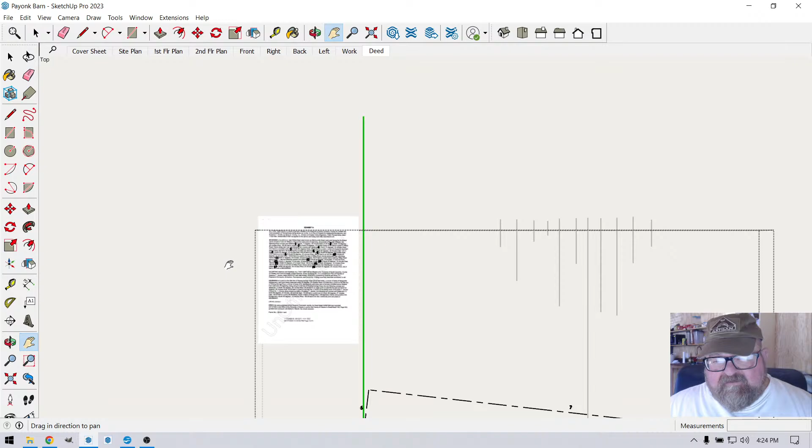Oh man, I was working on Sabrina's barn. I think I have a video on this already. Let's just go to the working file. I'll show you, this is the barn, and this project started off as a simple barn, right?

Nothing in life is simple. Whoops, let me turn off the air conditioner because people will say, I can't hear. Now let's check our fancy system here, see if I'm still in the frame since I moved my big butt to turn off the air conditioner.

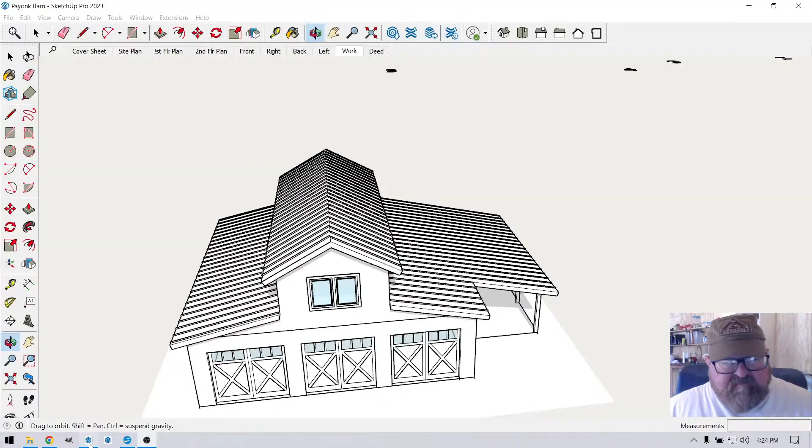Anyway, where are we? Let's turn on the site plan. In any event, don't pay attention to these lines that appear. So I go to do her site plan, and I find out there's this contested property line right here. This is the survey I was given from these guys, and I was like, how does this happen? You know, if you're doing a survey, it's weird. This property line from 1973,

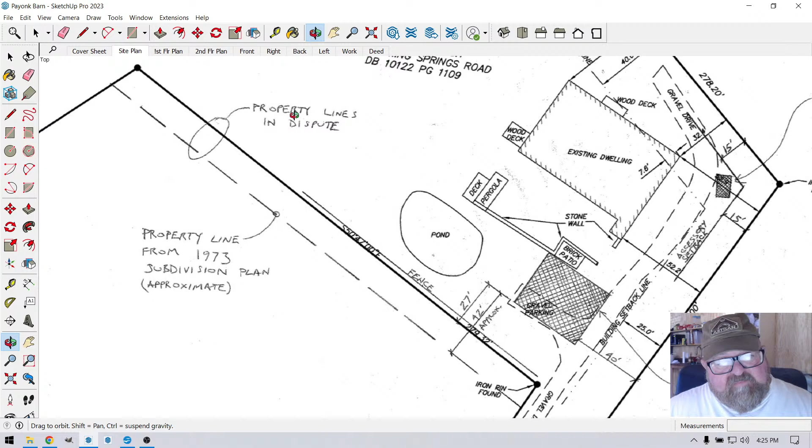property line in dispute. Okay, so I said to Sabrina, Sabrina, where is your deed? That is what you own. This is just a graphic representation of what you own. This piece of paper is not your deed. This is not,

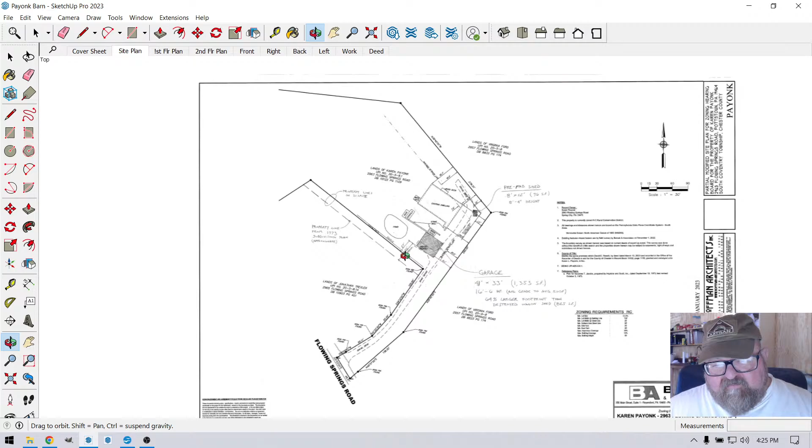I mean, here's what people get confused, okay? This drawing is done by a licensed surveyor, but it is not your property. This is not your legal description. Your legal description is in your deed right here, okay? So what I did was I went in and I picked out all these points. This one paragraph basically tells you everything about your property. And this is part of her deed, okay.

And you can read it: beginning at a point in or near Hilltop Road, also known as Birch Runville Road, said point being the southeast corner of land of John E. Williams. Thence from said point of beginning along lands of the said Williams, the following three courses, and all this rigmarole doesn't really mean anything except these numbers.

Well, and letters. Here you go. Number 1: North, 11 degrees, 40 minutes East, 81.5 feet. Okay, so these little red numbers are mine because I was having a hard time following, since there's literally extra callouts in here starting after number 10 than what are on her drawing.

And so this started to get complicated. So what I did, and this is usually what I do when I get ready to do a survey or draw one, I'll set up a spreadsheet, let's see if I can make it bigger, that will have the callouts on it.

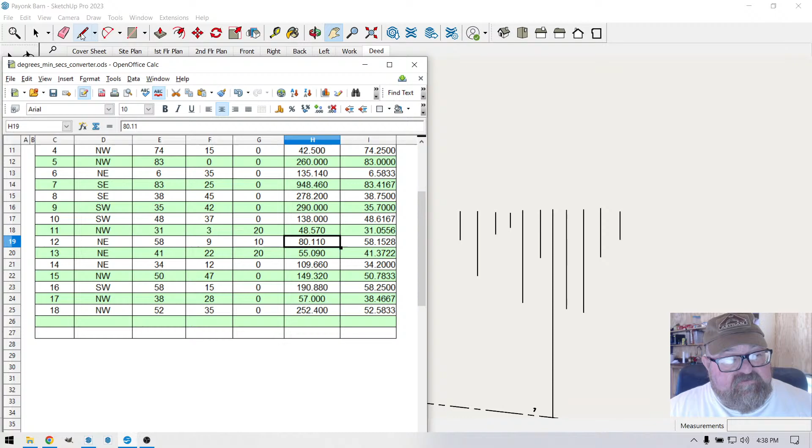So what I do next is let me bring this back up. Let me get this. Now I'm going to lose it again. Yeah, now I got to bring it back up. Let me get this one selected, I'll bring this up. All right, so that's when I need my window. I had the default tray on SketchUp moved closed because it was in the way when I was trying to do the deed and the table, the spreadsheet. So now I can see, so now I can check up here on the entity info panel.

You just click on the line and it will tell you right here - 81.5. So 81.5, okay. Number 2 is 182. Number 3, and I wish there was a way I could make this stay up there. I thought if I was only selecting this, anyway, 63 feet. This is 42.5. Next one should be 260.

That's what I should do, is just do a couple at a time. And then 135, 14. 135, 14. I'm checking these because I missed one. This was the long one.

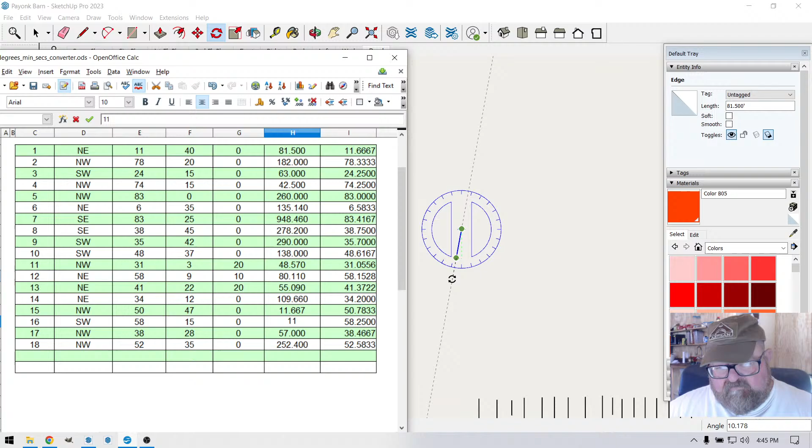Okay, so again, it's been a long time since I've done this. What you do is once you start turning it, you turn it to where it's facing northeast, okay? And you click, and then you can type in your number down here. You see, 11. And when you're doing it, you won't have this problem because...

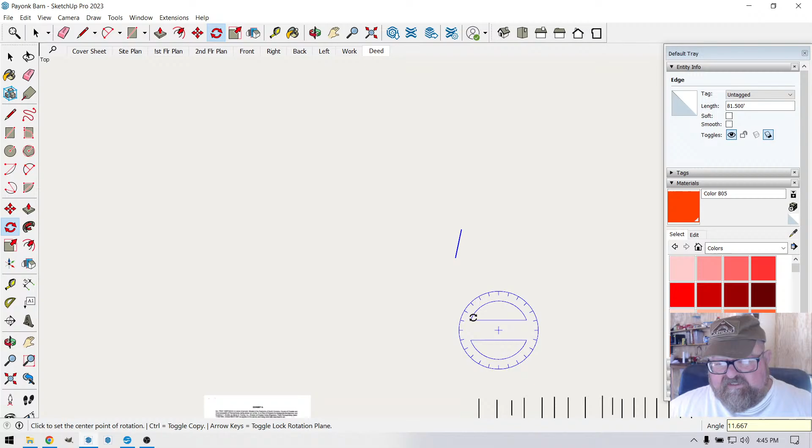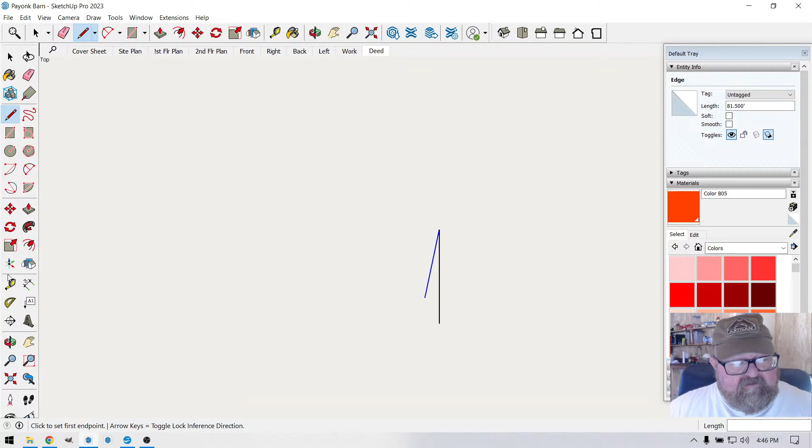It's the easiest thing to do is to print this out so you can look at it, you know. But if I just put myself a straight line down here, okay, and I get the compass tool out and I do this, you'll see down there in the bottom corner, 11.667 degrees, okay. So it might not have looked like it worked, but it did. And as I go through these, I'll try to remember this number better. Yeah, like the next one is...

78.333 degrees, okay? So now I'm going to go select it. Now I kind of know where it goes, but the way these callouts work is the next line is a continuation of the first one, okay? So I'm going to move it up here, but I'm not going to connect it yet, okay? I'm not ready to connect it until I get this at the proper angle, okay?

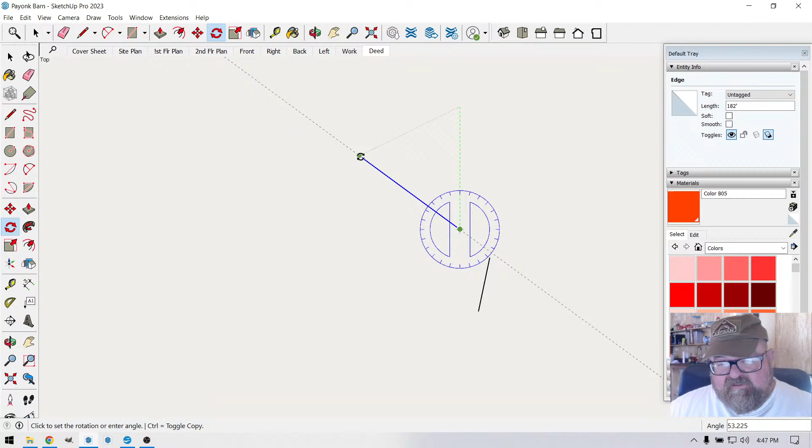Now I'm going to go, I'm going to click on this. I'm going to get my rotation tool going, and I need this to go this way, right? It's going to go this way, and what did I say? 78.3333. Okay, so I'm going to rotate it this way.

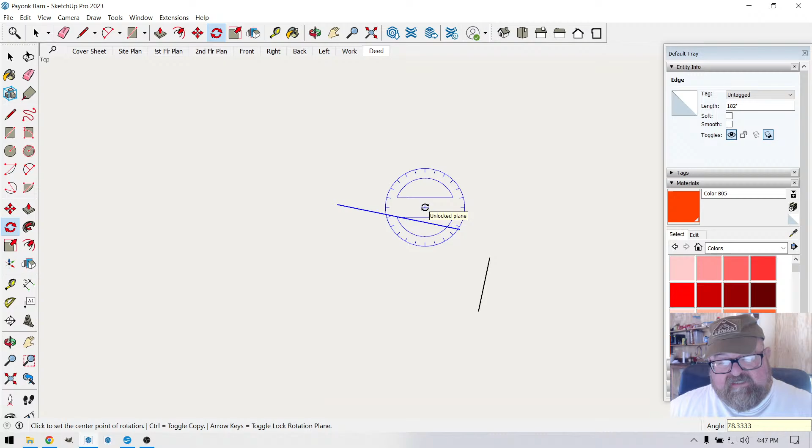Okay, then I'm going to type in 78.3333. You see how it changed? It doesn't matter. You know, if you draw a line and you rotate it, you grabbed one end and you grab the other end and you rotate it. Oops, I didn't mean to grab both of them. If you grab a line and you're rotating it, wherever you stop doesn't really matter as long as it's going in the right direction, okay?

You see down at the bottom, you see the relative angle. That angle is relative to the item that you selected. So as long as you get it going, and you noticed this was straight up and down, the last line I did, okay? But I tilted it in that direction because I knew it was 78 degrees, right? And then all I did was let go, and then I can type in the angle. As long as you type it in right after you click, it's going to work. So now what I can do is connect them.

Okay, now I can take this line and move up here. Now, some people may think this is kind of a crude way to do this, and maybe you're right. I don't know, but this is the way I've always done it, and I've never had any trouble with it. This is going to be number 3, and it goes...

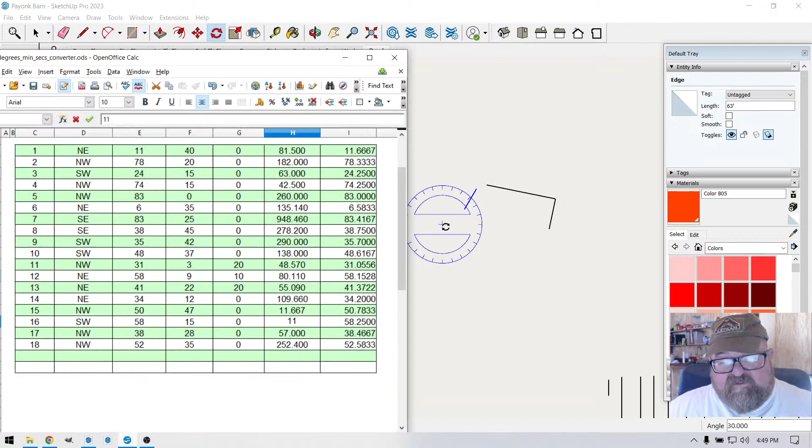24 point. It goes southwest. Okay, so when I see southwest, I know southwest is that way. Okay, so I'm just going to click southwest, and I'm going to go back and check my angle. 24.25. Now I'm going to go down here. 24.25. You see it move a little bit? It corrected it because I typed in the correct angle. Now I've got it the right angle.

I can do that. Now let's move this one up here. Let's move, well, I don't want to move them all. Let's move this up here. Let's see if I can remember one so I don't have to annoy you people with going back and forth. This one is northwest.

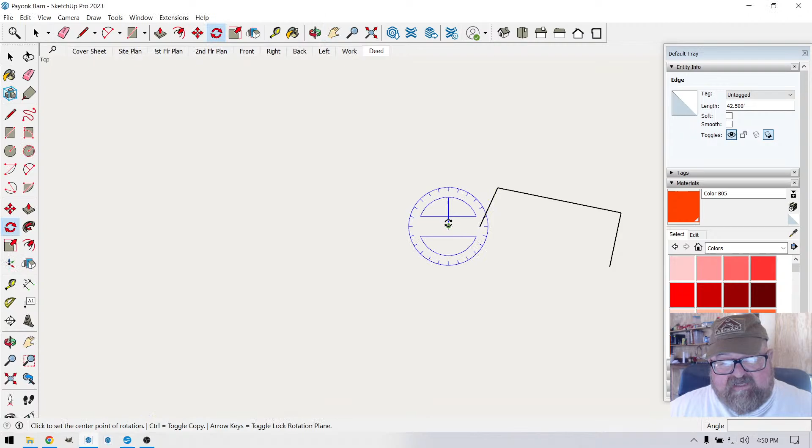74.25. Okay, so northwest, if you know your map angles, your directions, you know the northwest is that way, right? And I don't know, I'm getting Alzheimer's now. 74.25. I've been looking at these degrees and angles and these numbers for 3 hours. Okay, so they're all in my head, and well, they're not in my head in the proper order.

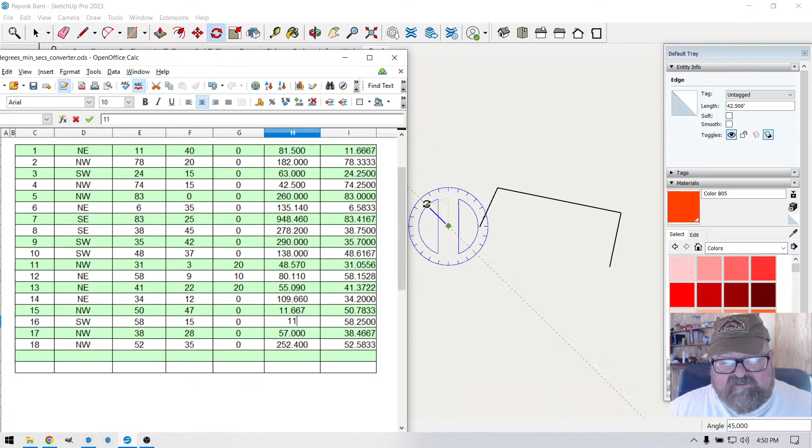74.25. So I'm just going to click in the northwest direction. Okay, now I'm going to type 74.25. Okay, you see it laid over. That's the way it should be going. Right there. Okay, let's get another one.

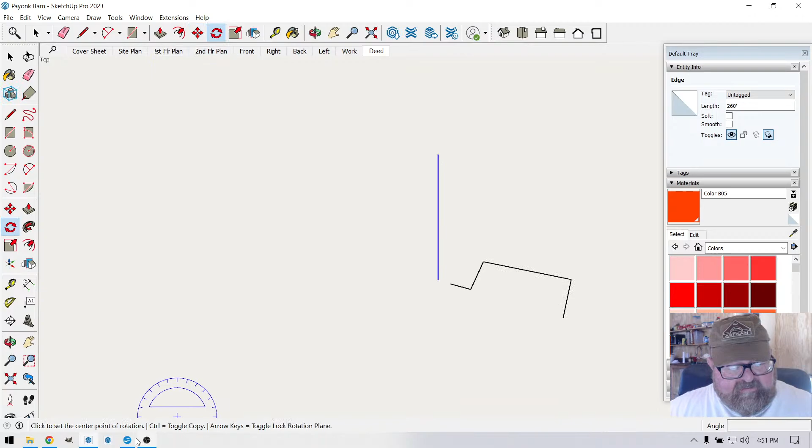And by the time we get to the end, we will be really good at it again. Now we're going 83 degrees. That's an easy one, northwest. Okay, so again, I got to go northwest. I'm just going to click anywhere, and then I'm going to type 83 degrees, and it'll fix itself. I like it when things fix themselves.

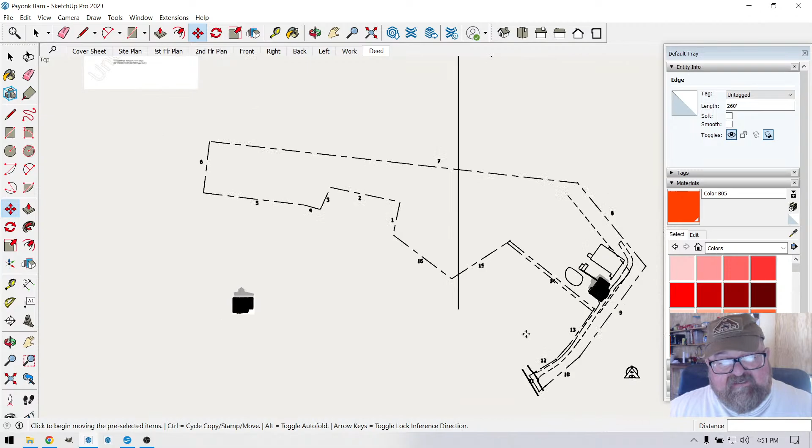One of the problems with this survey is that this file was given to me by a surveyor, I did not draw this. His drawing doesn't even close, right? And it's because he's left out some things from the deed, and that's why I'm doing this. I'm trying to show the owner that... I guess it closes there.

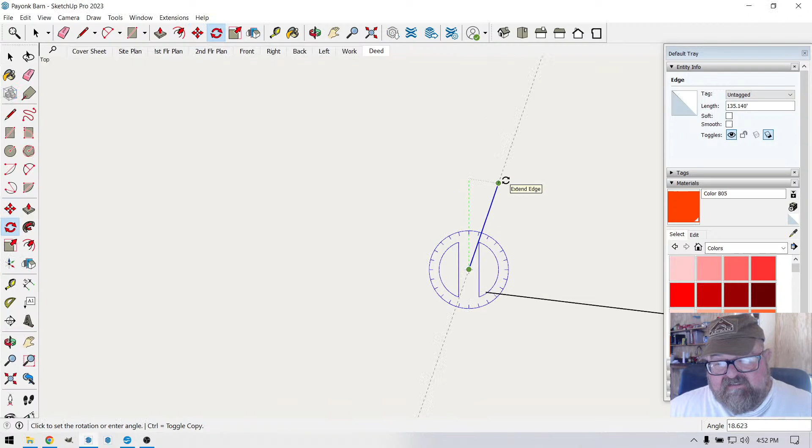So then this one, we'll move it up here kind of relatively where it goes, and then we'll go look at our angle. That is northeast, 6 point... You know what I could do? Can I do this? Can I copy that angle? Am I getting smart? Go northeast. That way's east. And then can I do control... No, you see that here? It wouldn't let me control V.

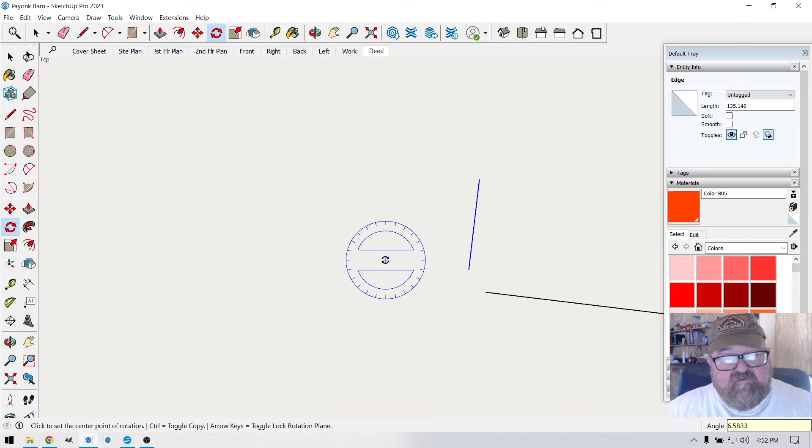So I'm gonna have to go back because I didn't remember. 6.5833. Part of the problem is I can't see my keyboard very well because I've got my laptop folded over, because I have a big monitor in front of me and I got my laptop down here, and the top of the laptop's leaning over towards me, and I'm having to look under my keyboard.

Then we got this big mother right here. We got Big Mama right here. So we're going to lay her up here, and we're going to go back to our table.

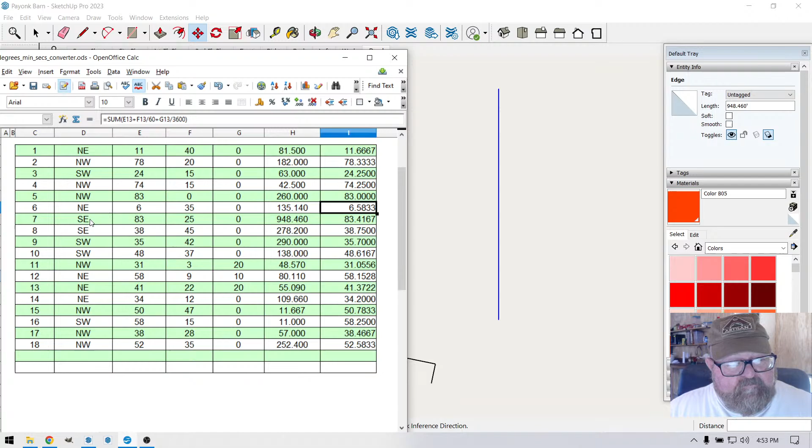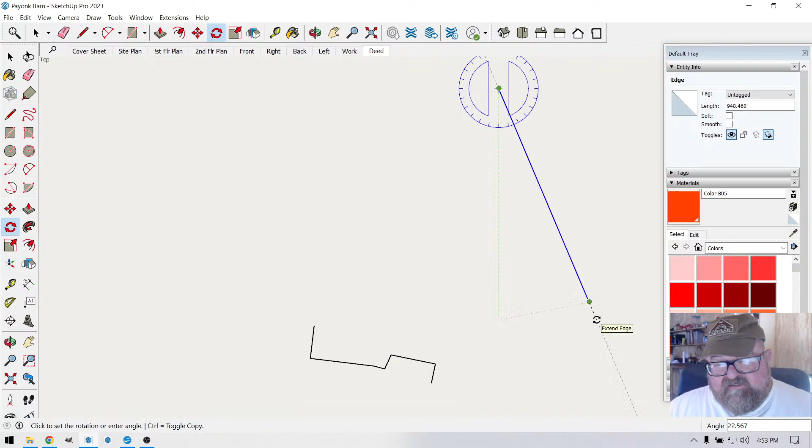83, it goes, so southeast, okay? And I'm just going to go ahead and... see, it confuses me a little bit because I know I'm going to lose my angle. I'm just going to do the southeast first, okay? So we know south is down, right? And we know east is that way. And I know this, I'm kind of cheating. I know it's way up here, but I'm just going to do it right here to show you how when I type in the angle, it's going to be fine.

834167. Now what's depressing is I have typed in the wrong angle before and have to go back and check every one of them. So we're going to pray that that doesn't happen here. It's hard to do a live stream though and be perfect at the same time. I try, I really do. Trying to be perfect.

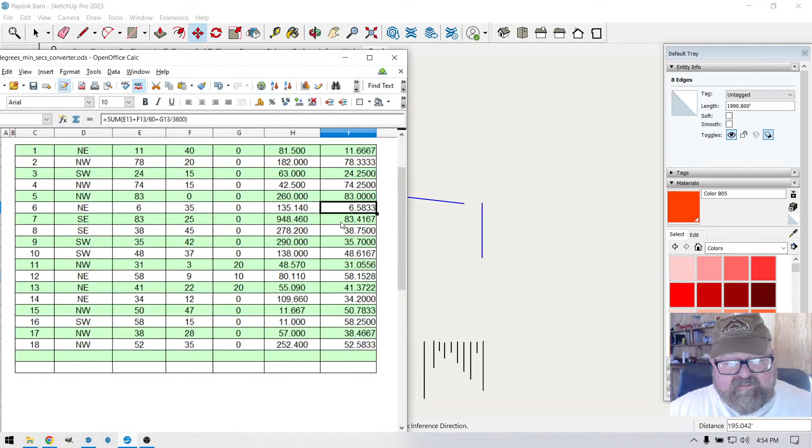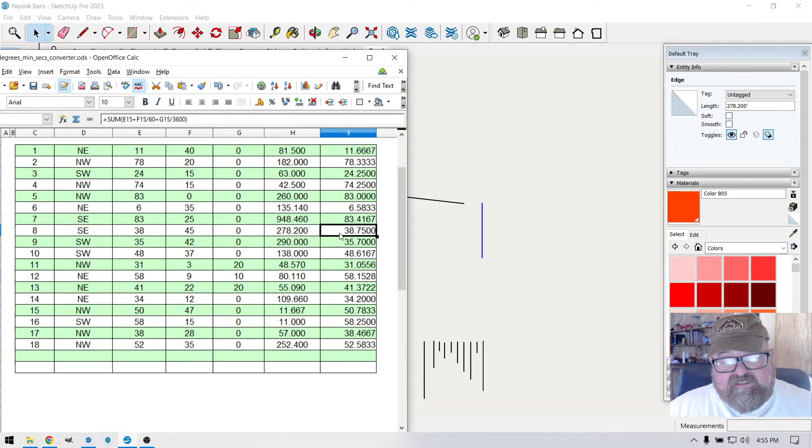So now we're at this. Let's see. We're at the two. I need to check to make sure which line I'm on, just to verify it. 278.2. Oh, we're all the way down here. Okay, so 3875 southeast. 3875, okay, I think I can remember that. Okay, southeast. 38.75. Oh, that's right. Huh, it's that one. Okay.

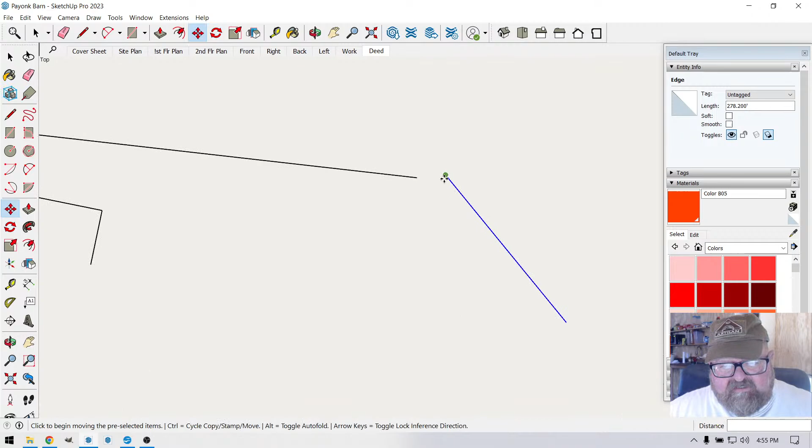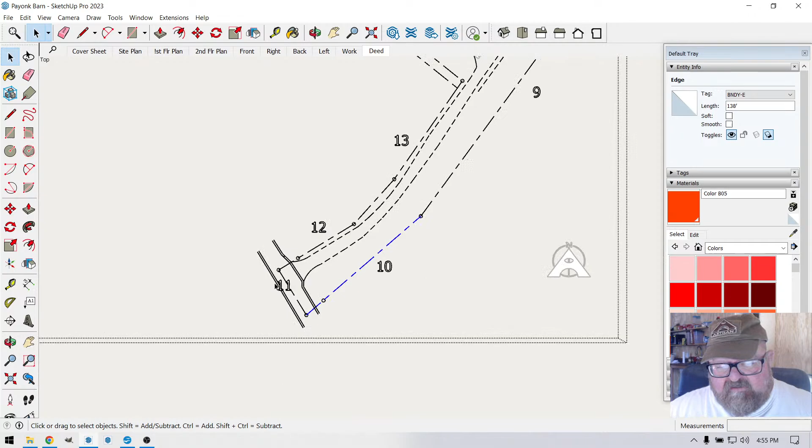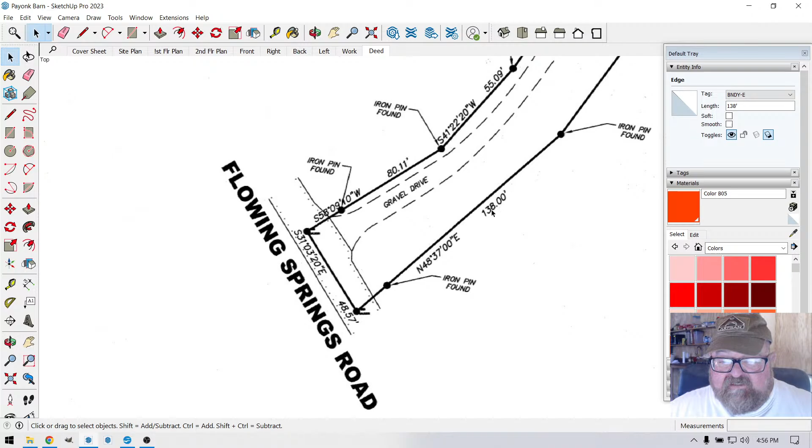I'm kind of cheating a little bit because I kind of know. If I didn't know what this property looked like, well, you kind of always kind of know what they look like, but I am referring to it, and there's going to be some funkiness down here when we get close to the road. I'm predicting, because you see this line right here, the surveyor is claiming this is all one line, but then he found a pin right here. That's a pin, okay, those little circles are pins. So if you come over here, he calls it out an iron pin, but he doesn't have a call out for that little short line segment, which is a boo-boo, right? Because you're supposed to stop at each pin, gets its own call out, right? Or each line does. So he's saying 138 feet goes all the way down to here.

So I believe the surveyor was doing some moonshine that day. I don't know what he was doing. Hitting the wacky weed, I'm just kidding. By the way, if you're seeing his name on this, I'm just trying to enter some humor into this. I don't know the guy, and so I shouldn't talk about him like that because he's a professional, and I don't want him to be mad at me.

But I do have a problem if it turns out he didn't even read the deed. That's where I'm going to question his manhood.

So 290 should be the next one, and you can see why some of these angles get confusing sometimes—they're similar looking. That one's the 290. Okay, this one should be 290.

Now the reason I like to keep them separate is because I could go ahead and connect this one, but sometimes honestly I'll start from the wrong end when doing the angle, since it doesn't really matter as long as I get it going in the right direction—and that would move that line. When you connect lines in SketchUp, they're connected for good until you disconnect them.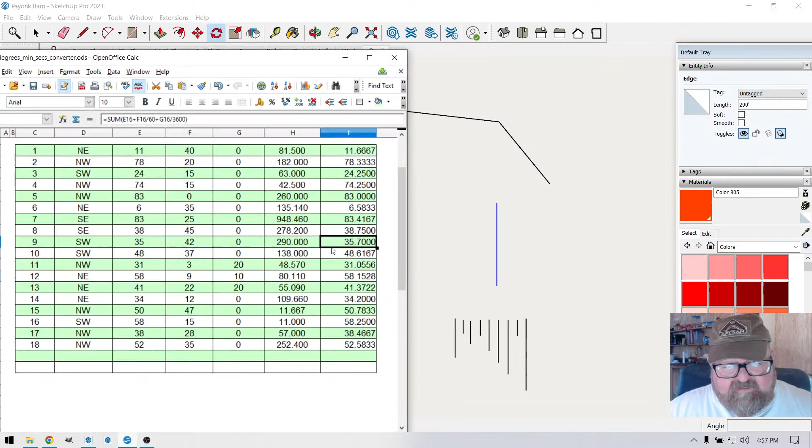Let's see, so I'm going to go here. I need to go 35.7 southwest. So I'm going to go down south, then west, and then cheat again—35.7. I'm going to come back here, 35.7.

Don't tell me I didn't see it move. Did I get it? I didn't get lucky, did I? Because I knew kind of where it was going. I'm going to do it up here and then type in 35.7. Okay, I'd feel better now—I must have got lucky because I didn't see it move.

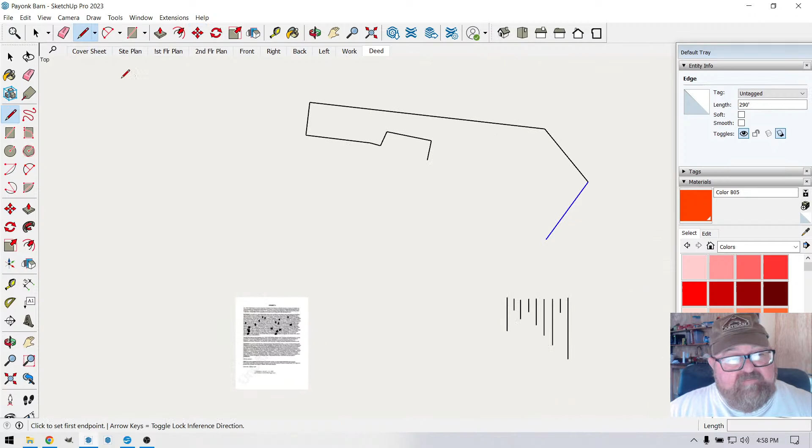Now we got this little line right here, so we're going to grab it, move it up. I did an update on SketchUp Pro 2023 and my buttons are all mixed up.

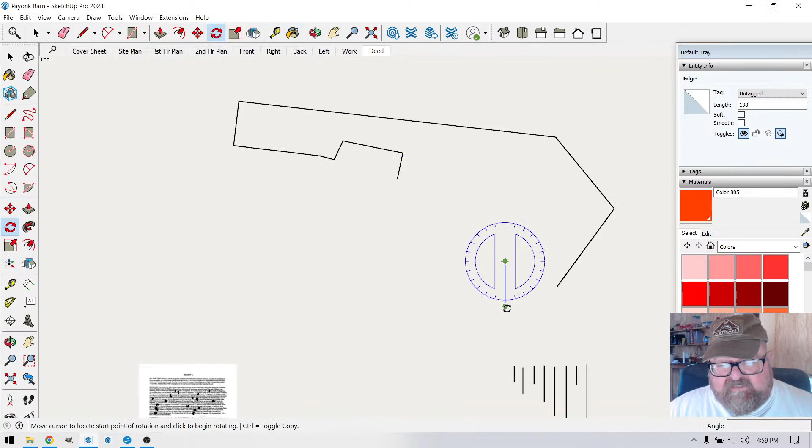This one's going to be 48. Yeah, I'm going to have to come back and revisit that one. So I know it's southwest, so I'm going to go south and then west, and then look at the angle: 48.6167. And then I'm going to go back and make sure—48.6167. You really need to get into a habit of double and triple checking.

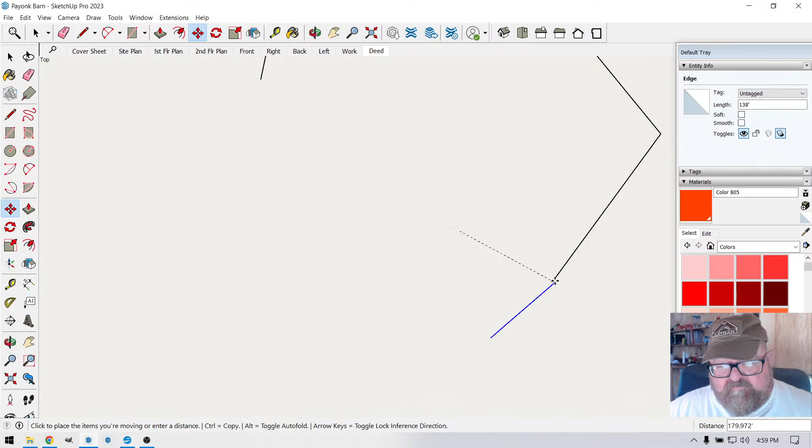I don't think that connected at the right spot. It didn't look right. That looks right.

Because you can really—now here's where we start to deviate, I think. Okay? This is... something's weird about this, and then this is where it gets weird, because there's an extra line in here somewhere. Or something's weird, but we're going to follow what the deed says. Okay? So, well, how long is this line?

This line is 48.57 feet. So that callout is this one right here. And it's supposed to go northwest, which makes sense.

38. Okay, or 31. So I'm just going to get the direction going and then come back. So I'm going to come down here—northwest is that way.

And it is 31.0556. Did I say that right? 31.0556. Okay, I believe it.

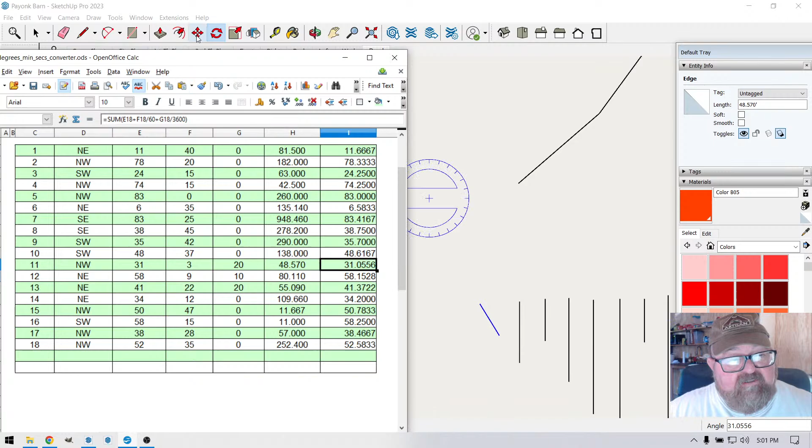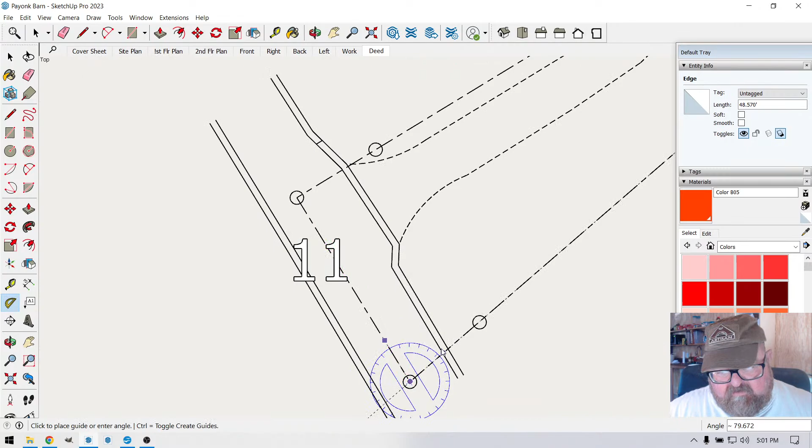Like that—it looks like it's less than 90 degrees though. That's confusing me. When I first saw that angle, I know this is less than 90. That's 79 degrees, so I don't know. Maybe it's not supposed to be. What is this one? Yeah, okay, I guess my impression was that that was 90 degrees, but I was wrong.

So now I'm going to move this one up here. This is where I start to not understand this whole thing right here, and I might even go back to the deed and verify this. So number 12 is—this line should be 80.11 feet, 80.11 feet, and it goes northeast.

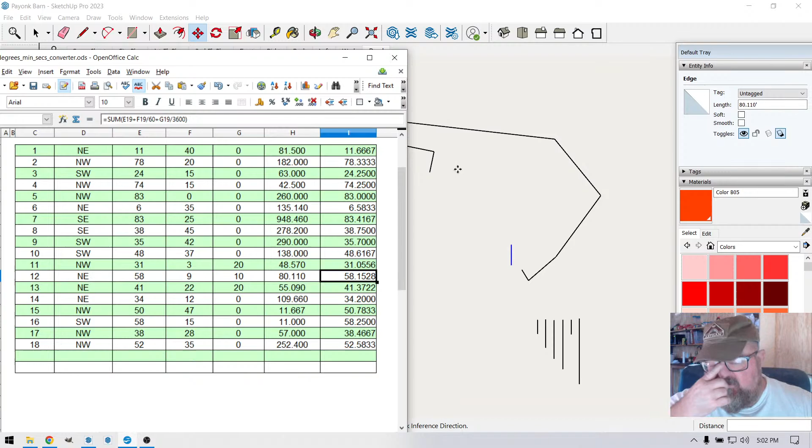Northeast is that way. Okay, at 58, 15, 28. 58, 15, 28.

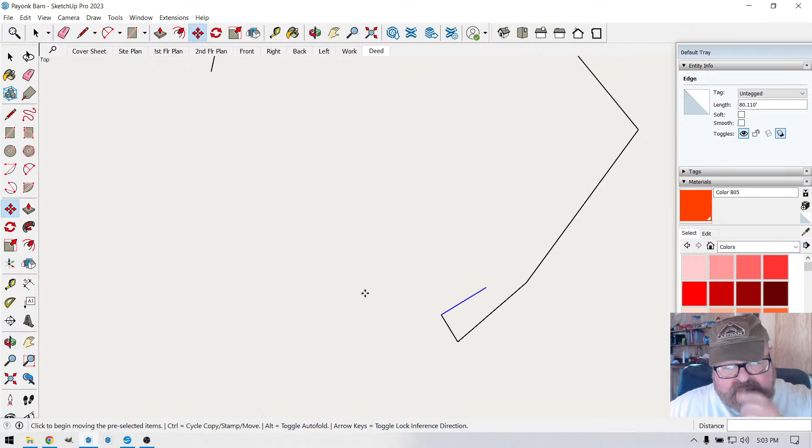Now we're starting to get somewhere. Am I? Or am I just imagining things? I'm probably imagining things. So let's go back here.

The next one is 41 feet. Let's just select it first and make sure—wait a minute, wait. Is that one 80? Yeah, okay, this is the mistake I made before. Right in here, for some reason, I got confused. So this one's supposed to be 55.09, and it goes northeast.

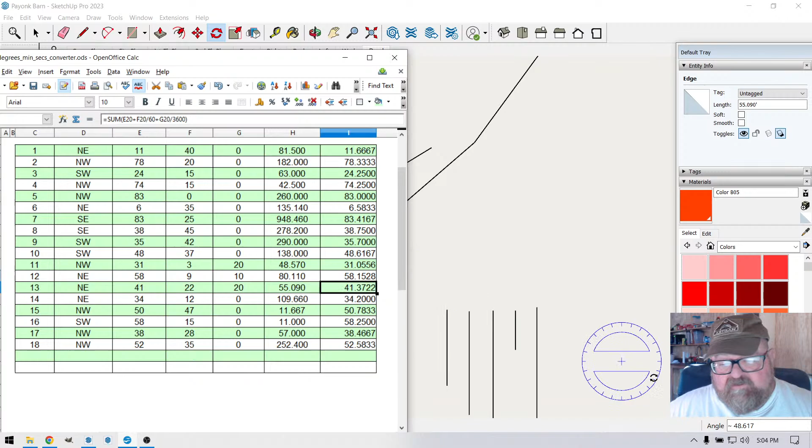Okay, so we're going to—oh wait, let's move it up here first. And then we're going to go northeast that way, and then check the angle: 41, 37, 22. Is that right? 41, 37, 22. Yep, okay.

Why does this... you see, this is different.

Okay, I think what would be funny is if mine closes based on the deed, and this surveyor's doesn't. That's what I'm hoping happens, because I want him to eat crow. I'm just kidding, this guy's gonna find out who I am and come sue me. But he lives in...

109, 109, 66. Stop making myself laugh. So we're going to go northeast again, 34.20. I think I can remember that one. Northeast. 34.20.

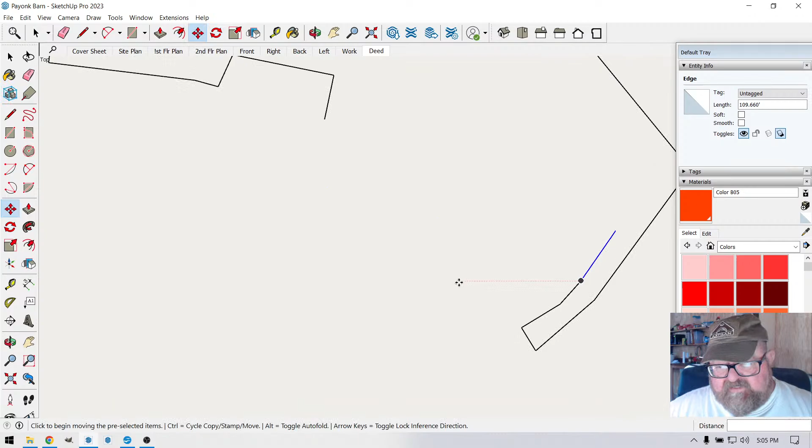Okay, I was looking over here and I didn't see it move, but that looks right. That looks close. Now this is where things get interesting also, because what is this, line number 15? Let's go investigate line number 15. Let's go to the deed book.

Oh, there is something weird here. Number 14 was 109.66. Number 15 was 149.32 feet. Wow, I must have been typing. Was I typing one time and it got entered over here accidentally? I think that's what happened. Switching back and forth from SketchUp to here, I think I was typing in degrees or something. Is there degrees up here? Yeah, look at that.

11.6667 was the degree for number 1, and somehow it ended up down here. See, this is why you got to continuously check this stuff. Number 15 is supposed to be 149.32. And then number 16 is supposed to be, that's the third line up, 190.88. I think the lines I've actually drawn are correct, and that's what made me wonder.

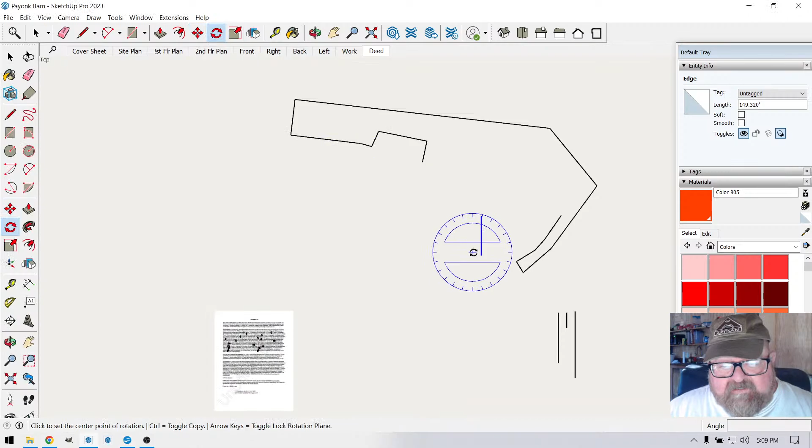Is this 149.32? 149.32, see, that's the correct length. Now I gotta go northwest. Let's just get the line going northwest. Oh, northwest, huh, that's northwest right there. And then 50.7833. 50.7833. Okay.

We're going to go over here and place it right there. I thought that line was longer. You know what, there must be two segments in here. Aha, how much you want to bet that's why his doesn't close? How much you want to bet by the time you get back around here? It's going to be fun. I'm excited, I'm hoping ours is going to close.

So the next line is supposed to be... what is that? 190, yeah, 190.880. 190.880. I'm going to move it up here because I thought that line segment's too short. So yeah, that makes sense. All right, so it's going to be.

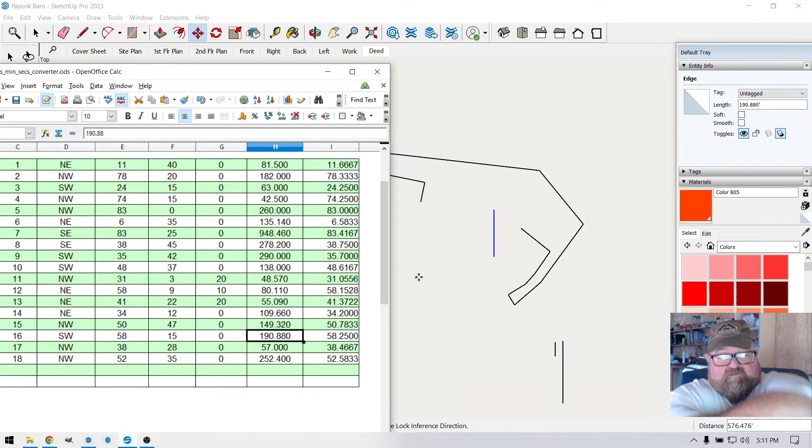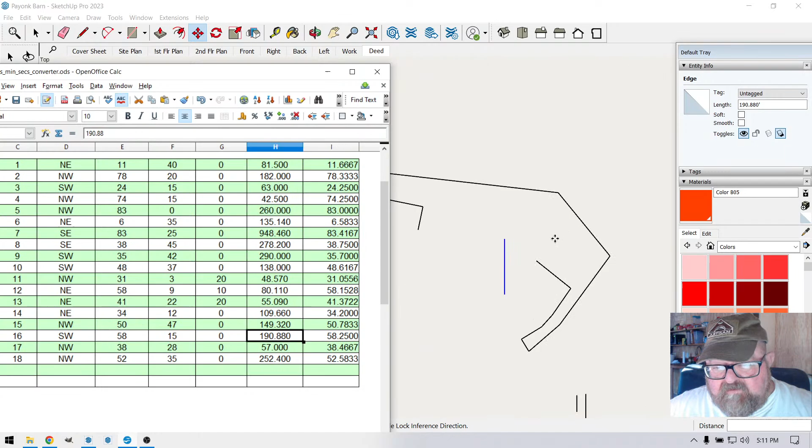See here though, this is different. These angles don't make sense to me. Where am I? 190.880 is 58.25, and it's going southwest. That's not right, number 16. It says southwest 58.15 for 190.88 feet. Okay, we will see, they changed directions on me. You notice how this one was northwest and this one's southwest? So we're going to go south and then west.

58.25. What? 58.25. Well, this is wrong. Oh wait, okay, I'm on drugs. It's this one, I thought there was two line segments here. You see, look how much longer. Look how much longer this line is. We're just going to copy it.

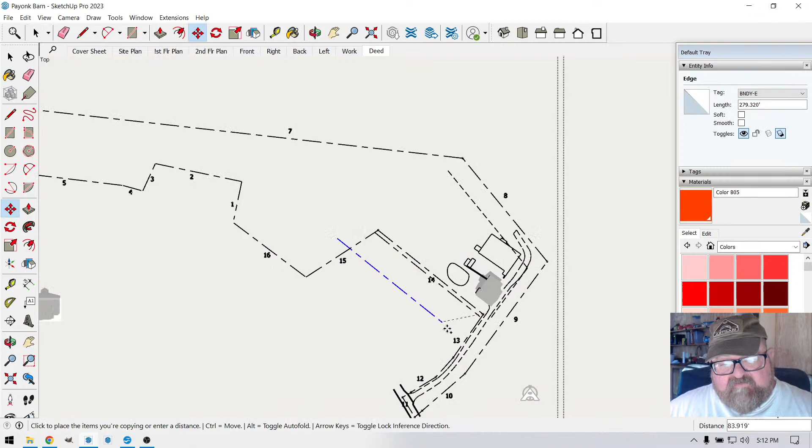This is the big mistake right here. I got this file literally from the surveyor. This file right here, I did nothing to it. Look at this, now you know why I'm confused. Okay, maybe you don't know why I'm confused, but that's why I'm confused. And...

The thing is, if I hadn't seen this down here, I wouldn't be confused. If I was just drawing this from scratch, I'd be just like, okay, next line, next fine line. But this line is 190.88, and then the next line is 57 feet. Okay, that's true.

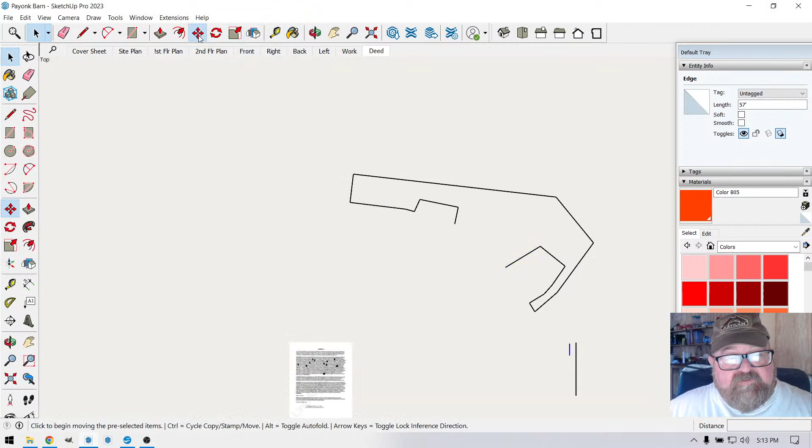So we're going to move it up here. And it goes northwest at 38.467.

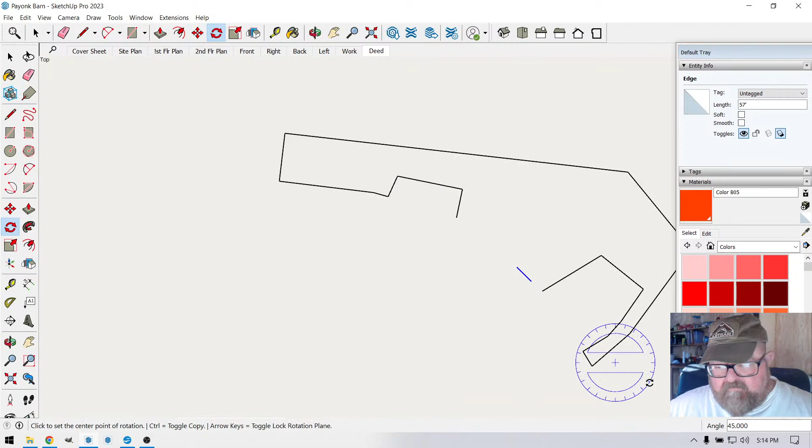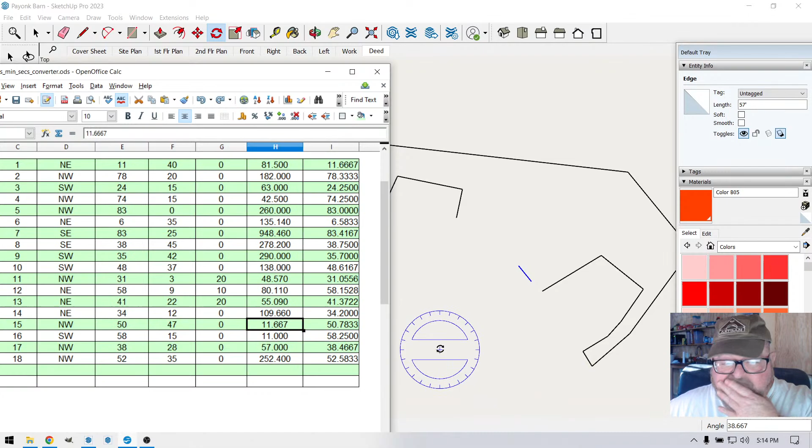Is that right? Four 667. Oh man, what am I doing? I'm on two different menus here.

You know what, that's what happened to this other one. I thought I was on this menu, and I was actually on this menu. So I got to be careful what I'm doing here. What I need to do is click over here and undo this, get it straight up and down again, then go back here.

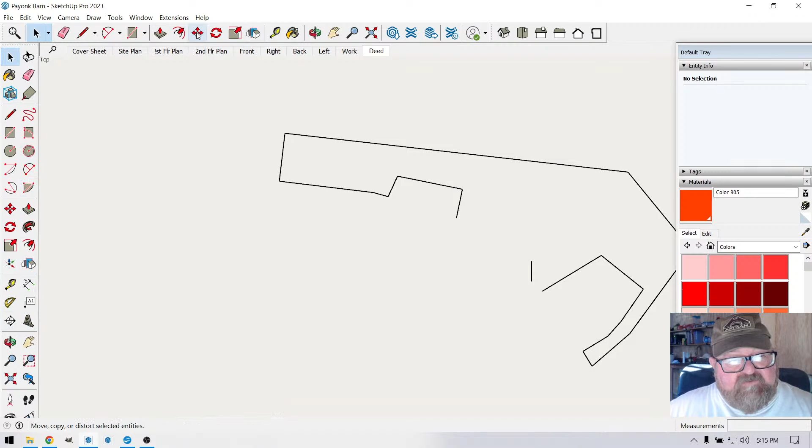And I'm just going to start off southwest. I don't know how that's southwest though. I mean, I know it's leaning southwest, but it should be. See, when you're going this way, it would be southeast. If you're going this way, it would be northwest. I don't get that, this is confusing me. Okay, so it is. Oh, it is. Oh wait, I'm on the wrong line. Okay, it is northwest. I know I'm on drugs.

38,467. 38.4667. Now we shall check it again because I can still see it down here. 38.4667. I've been dealing with these numbers all day, and I'm about out of brain power. Oops!

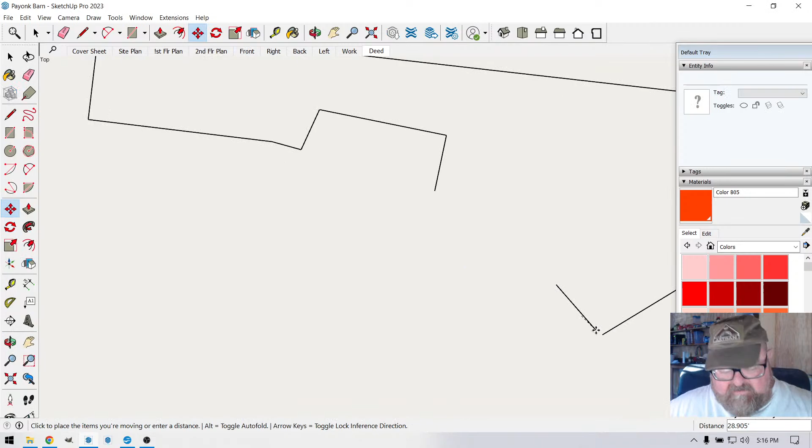Don't do that, Tony. I can't, my eyes are all watery. I can't see.

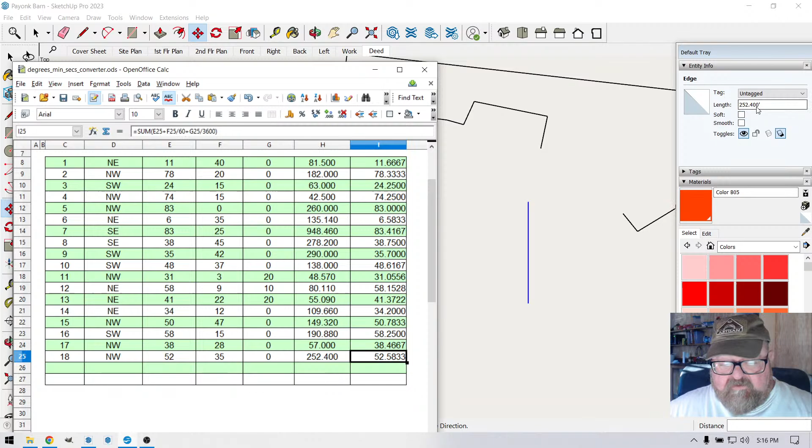Now, the last line, is she going to close? Let's bring her up here and we'll just... so the last one is this one. And let's make sure it's 252.4. There it is. And it's northwest. So we're going to start at northwest.

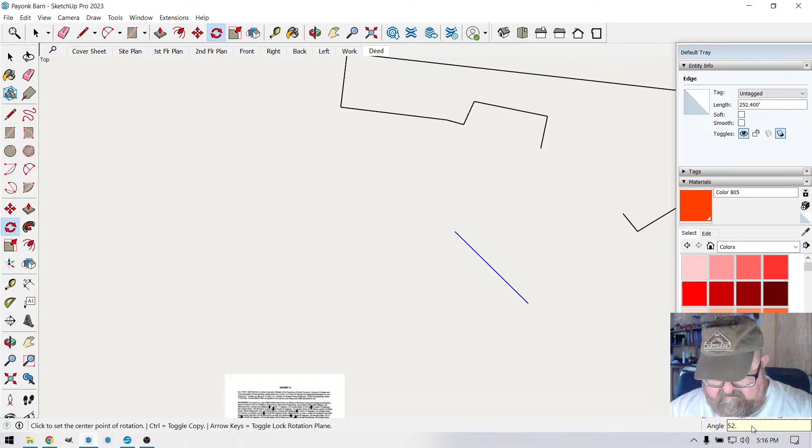And then we're going to type in 525833. 52.5833. All right, here we go. Here's the big one. Now, what I do on the last one, okay?

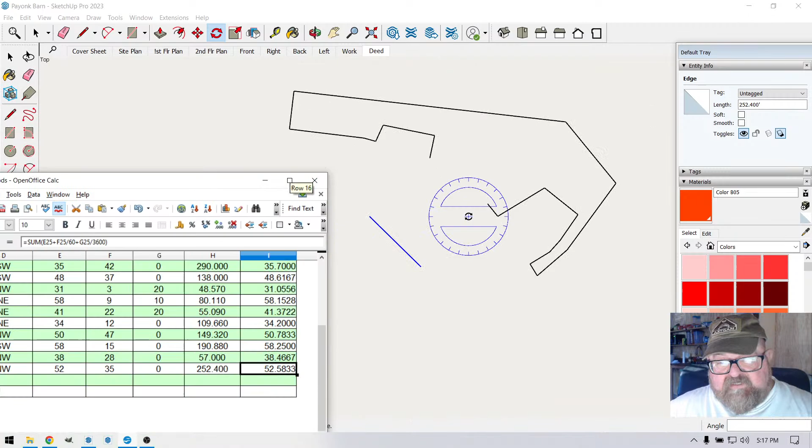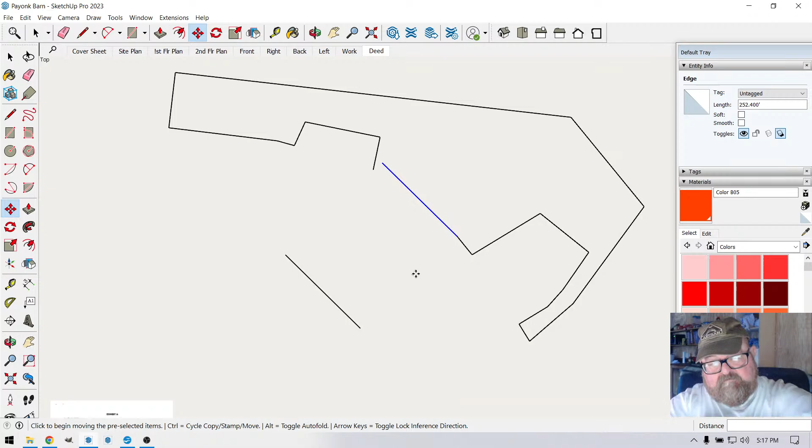I'm going to copy it because I want to leave it there. Yeah, see. Oh man. I want to redo that. Something tells me, is it?

Let's see how far. Here's one way to do this too, because that would have closed it, and the length of that line is 256.96. So there's no way that's 4 feet short.

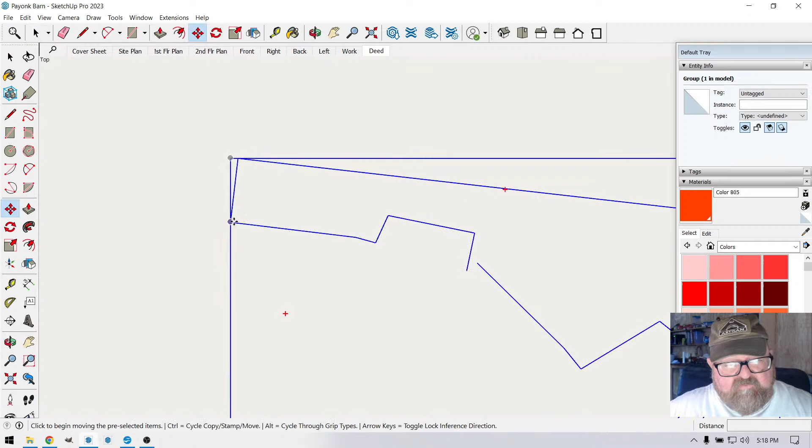Let's make this a group, and we're going to lay it over. We're just going to pick a point, this point right here, and see if we can see what it is.

Where it starts to get funky. Well, this is part of the problem right here. It was sticking out like a sore thumb, wasn't it?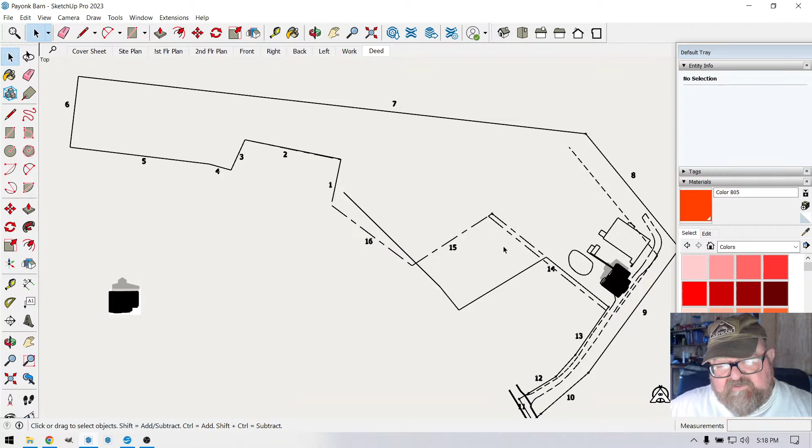Remember how I said, I was showing earlier how this line was much longer. See, I asked Sabrina to get the deeds from this guy and this guy, these deeds right here, because it seemed like something was funky right here.

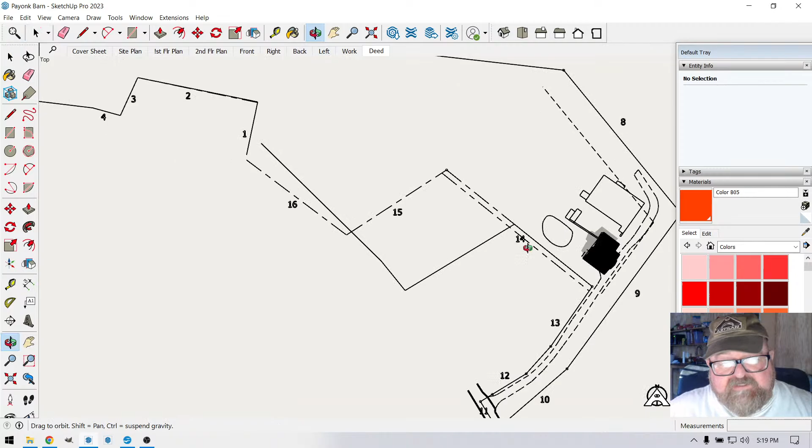And this is where the barn's going to go, right here. And the issue is, you see, the issue is she needs to have 25 feet. This is what started the whole conversation for me. She needs to have 25 feet right here. She's not that far off.

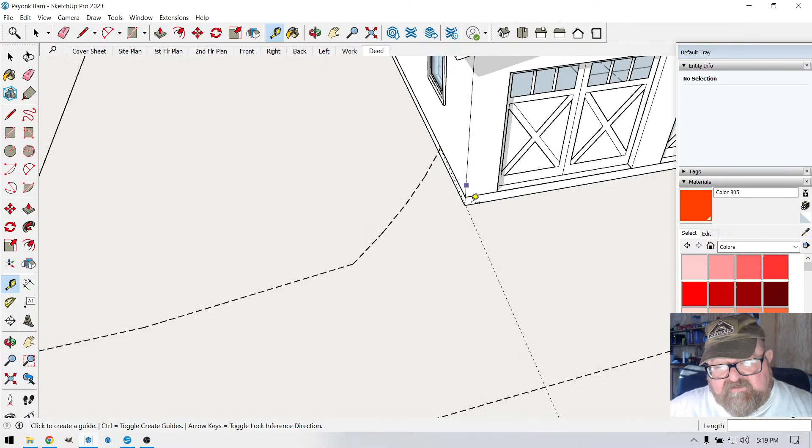Look, yeah, we're 25, I remember this. We're 25 feet from this, but it angles. You see, and you have to be 25 feet at this point right here. So this would have to move over. This corner would have to be moved over there.

We're thinking about making the barn smaller anyway. So if you have any questions... No questions.

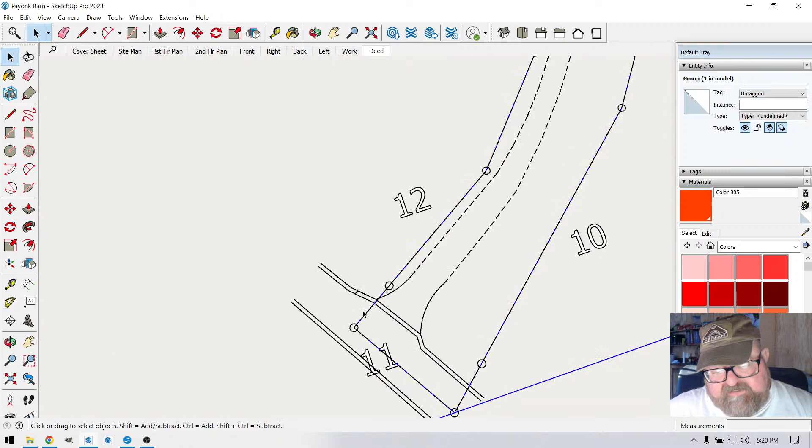So the only thing I know to do is... I'm kind of weirded out because this actually lines up. I didn't think that was going to line up, and I'm really kind of surprised this all lines up. I think what I'm going to check is there's no way this is only...

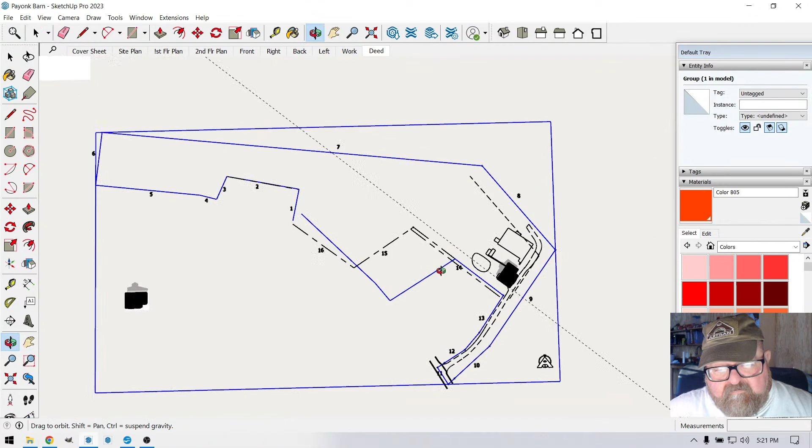Let's go to number 14 again, on the deed.

34 12. 109.660. Is this the right line? I have a hard time following the lines for some reason. East, go back. Yeah, 10966. There it is right there.

And then 15 is 149.32. 16 is 190.88. 17 is 57 feet. And 18 is 252.4. Then if we went back to...

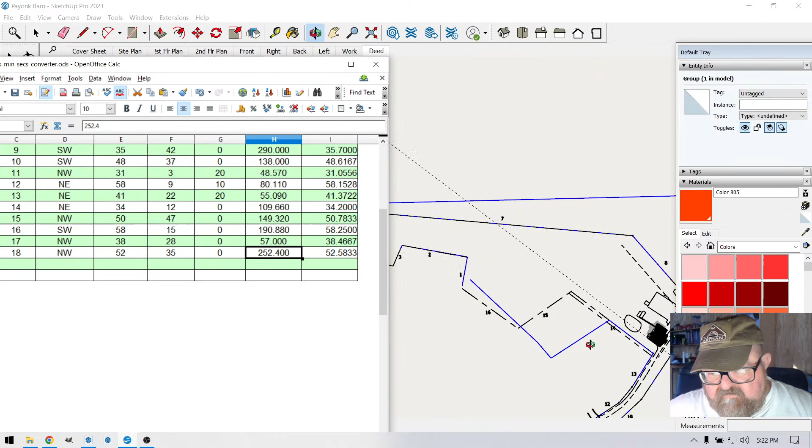I kind of knew when I was getting in this area right here something was going to get funky. I could tell, but I don't know. This is bizarre because there's actually somebody you see here.

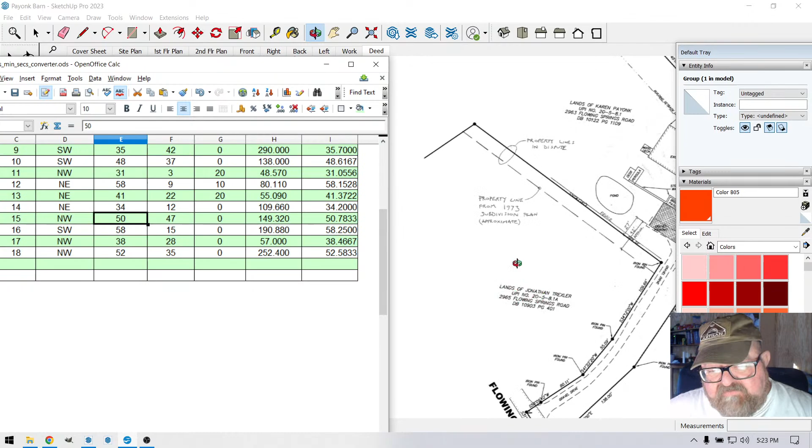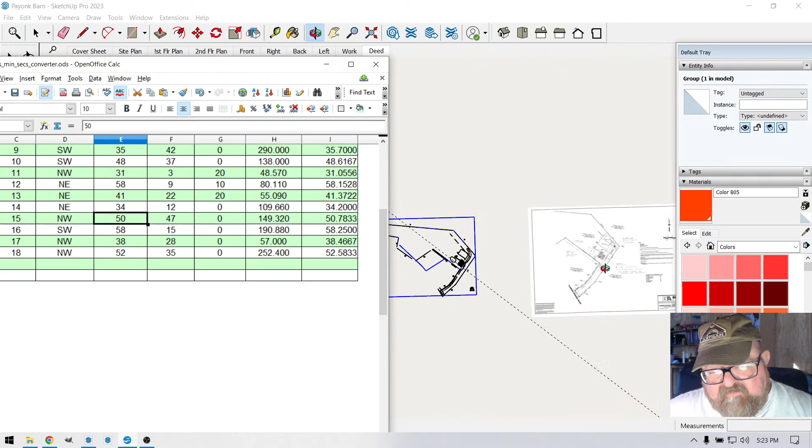Here's this is kind of a, you see how this is kind of offset, it's not really in the middle of this whole big thing. It's almost like, and you see where this fence stops? It's almost like at some point in time there was a lot line abandoned or moved, because that one would have had to have been moved because it's down, this one is down here.

I wonder if that angle lines up. It doesn't look like it does. No.

So that's interesting, but I don't know what I was saying before. This, I think, is some kind of...

38 degrees. I thought this was some kind of easement. She said something about an easement.

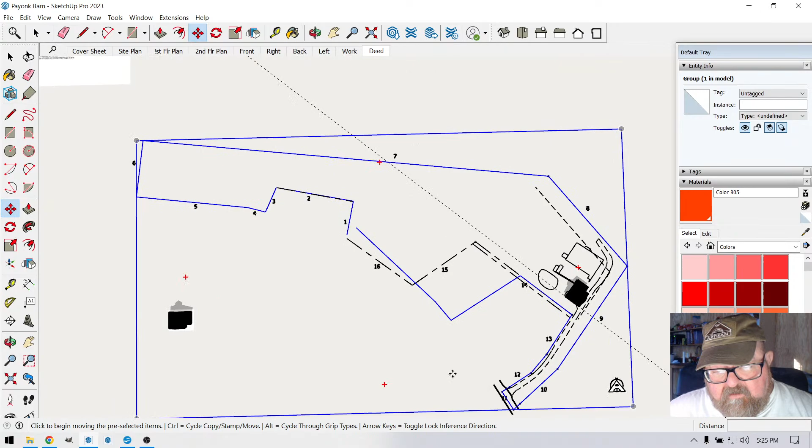Something weird, something weird. This is the survey that was done in November, wow, November of 2022.

My impression is that here's the setbacks right here. Rear yard's 40, side from street, setback from street line 50 feet. Holy cow, I wonder if she knows this.

I'm glad we did this video, because I wouldn't have known, she gave me the setbacks.

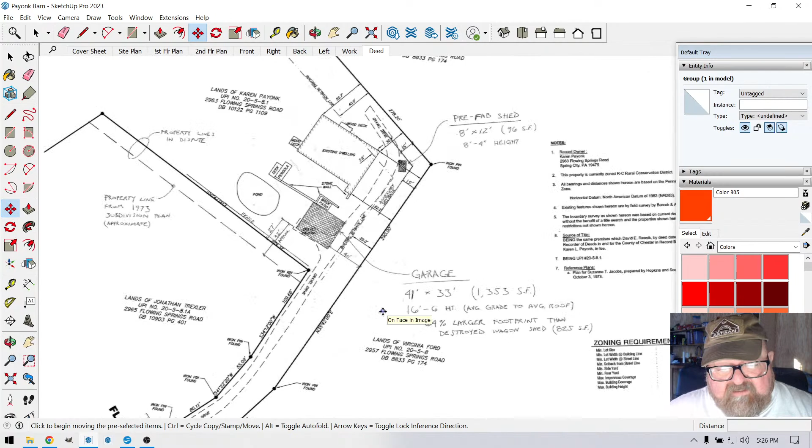Anyway, it looks like what I'm going to have to do is a part 2. The main thing I was trying to do was show people, if you're interested in converting angles, the importance of double checking everything, because you can see that in most cases it's going to close, right? But sometimes you'll have this situation where it won't.

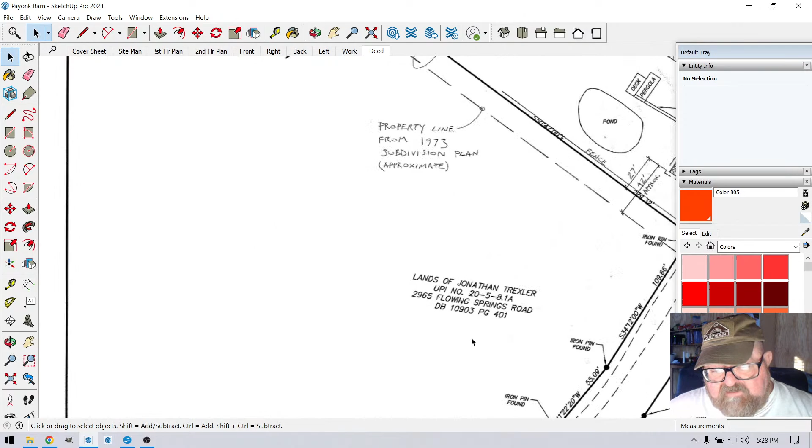These are Trexler. I remember seeing another survey somewhere that was different, it was like hand drawn. This is computer generated. But there was another survey that was hand drawn by some surveyor that had a couple of these names, and I think they're over here, right in here, because see, this road comes up like this, and somehow winds its way up here.

Anyway, I'm gonna play around with this a little bit, but again, keep an eye out for part two.

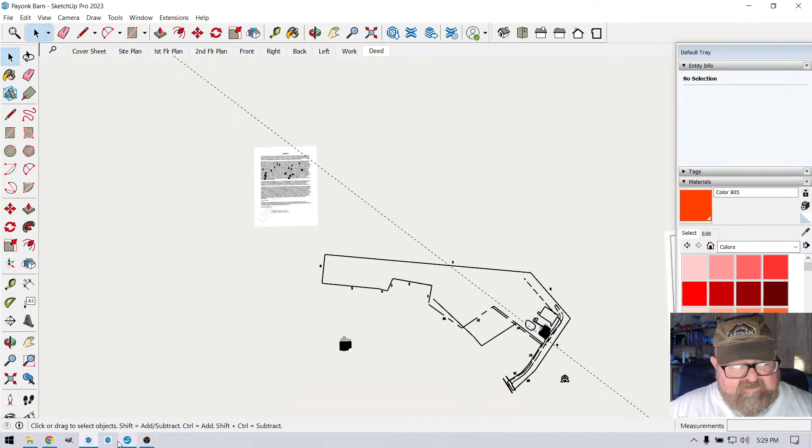If anybody is interested in this spreadsheet, I can send it to you, you can just fill in your own data. I have actually a control one here because I was afraid I would screw up the formula or whatever, so I used this as a control in case I screw this one up over here.

Okay, where did it go? Alrighty then. That's weird. It wouldn't go, it wouldn't go all the way back. Okay, thanks a lot, Open Office Calc, for freaking me out. As a matter of fact, I'm going to save this before I do any other crazy mess.

So anyway, I hope that helped. I know this was a long and drawn out video, but if anybody's interested in talking about how these minutes, these degrees, minutes, and seconds are converted to angles, again, if you made it this far, it's basically just...

E8. What you're basically doing is taking the degrees that you're given in the deed, and you're taking the minutes, which is 40, you're dividing it by 60, and then you're taking the seconds and dividing them by 3600, and you're taking those two numbers and adding it to the degrees. The result of F8 divided by 60 and H8 divided by 3600, the sum of all that is your angle. Okay.